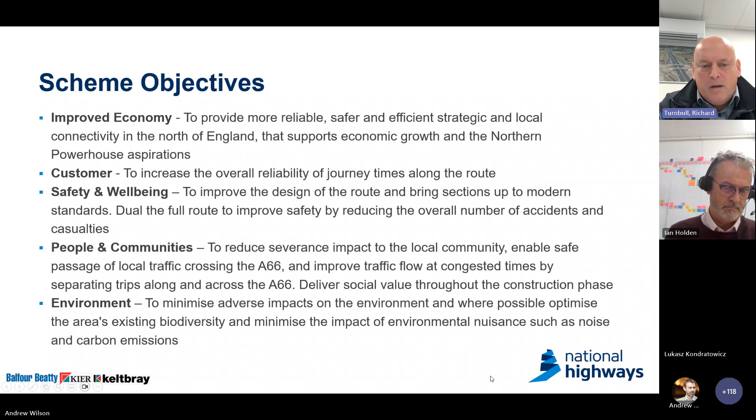Next slide, please, Andrew. So just to give an overview of the project, the scheme actually runs from Penrith in the west to Scotch Corner in the east. So junction 40 M6 is Penrith over to Scotch Corner. That's roughly 50 miles from Penrith to Scotch Corner.

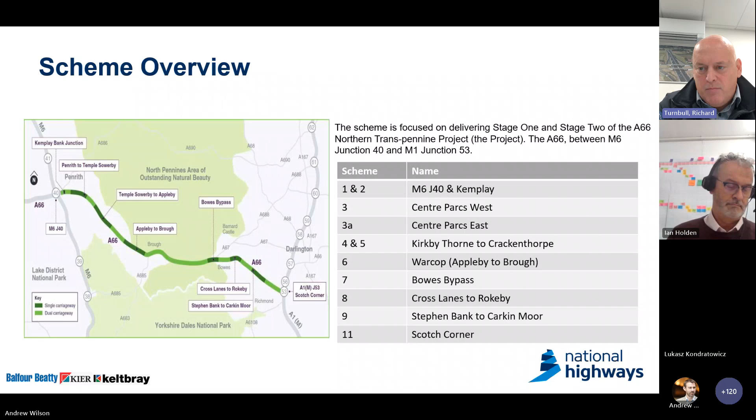Historically, over the years, 35 miles has been dualled in sections, and the scheme is to complete the dualling of the remaining 15 miles, over a series of schemes in one fell swoop. And I'll break that down on the next two slides, if we can move on, please, Andrew.

Starting at the west at junction 40, the Kier team will deliver the upgrade to the M6 junction 40 scheme and upgrade the existing A66 through Kemplay Bank.

We then move on to a section adjacent to Centre Parcs between Penrith and Temple Sowerby. That scheme will be delivered partly by Keltbray, scheme 3A, and a BBA scheme 3B to complete that as an interface there.

We then move along to a section where we actually go offline of the existing A66 route, and this is the only section where we have a bypass as such. So that's a Balfour Beatty Atkins scheme to upgrade the A66 offline and then in future detrunk the existing A66.

And then we move on to another section of online upgrade of the existing single carriageway to dual carriageway at Warcop, Appleby to Brough, which will be delivered by Kier.

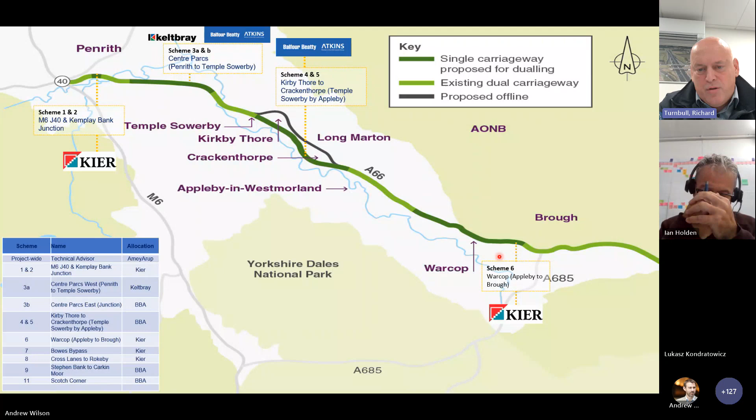Now those schemes, the first schemes we start, are further in development. The detailed design for those schemes is nearly complete. I'll move on to the milestones in the future, and give an indication of when we're actually starting works on those schemes.

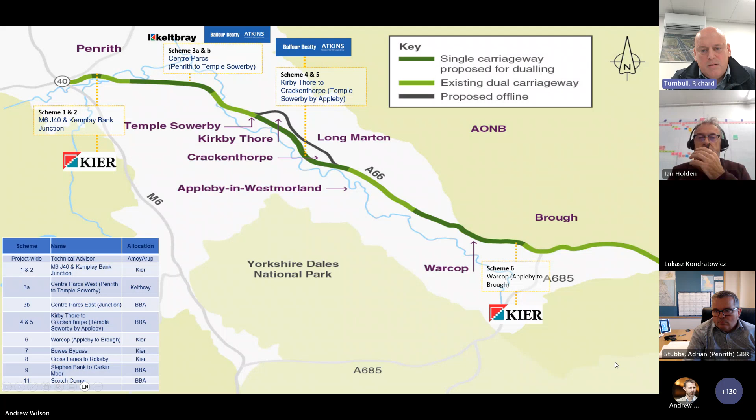Now, the design contracts for these schemes were awarded earlier this year, so these schemes are now moving into detailed design. They are a little bit further behind in programme than the schemes in the west.

So those schemes involve online upgrades of the existing single carriageway, and then some works around junction 53 on the A1 to upgrade at Scotch Corner. On completion of the scheme, we'll have a dual carriageway linking Penrith to Scotch Corner.

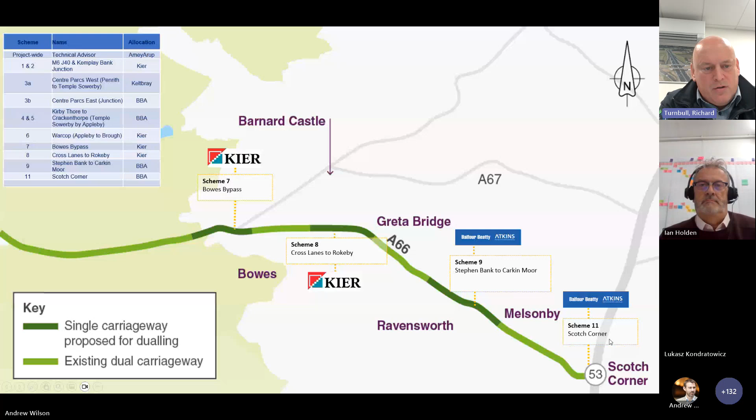We're expecting to start the earthwork season in 2025, delivering that mainly through four earthwork seasons and maximising those periods of hopefully decent weather, with 2028 allowing us to complete the later plugs released by diversions and structure completions and so on.

Typically the material that we'll be going through is glacial deposits over rock, with pretty much no hard excavation expected from the ground investigation we've carried out. Most schemes will have a cut-fill balance with limited haulage of that material going onto the road network.

At the moment, we don't anticipate any haulage between schemes in the west to the scheme over the Pennines to schemes in the east. They'll be operating and delivered independent of each other.

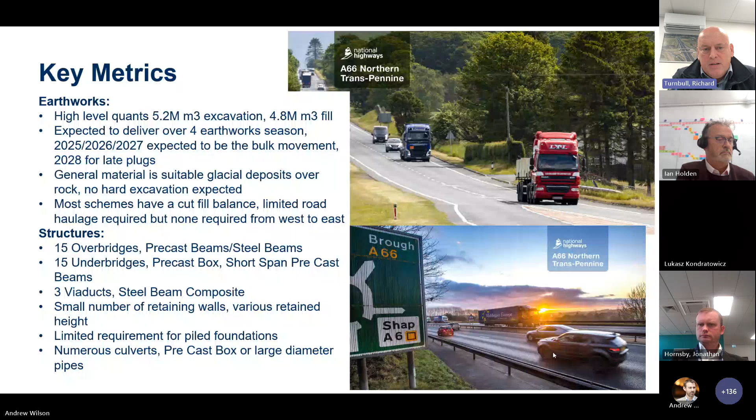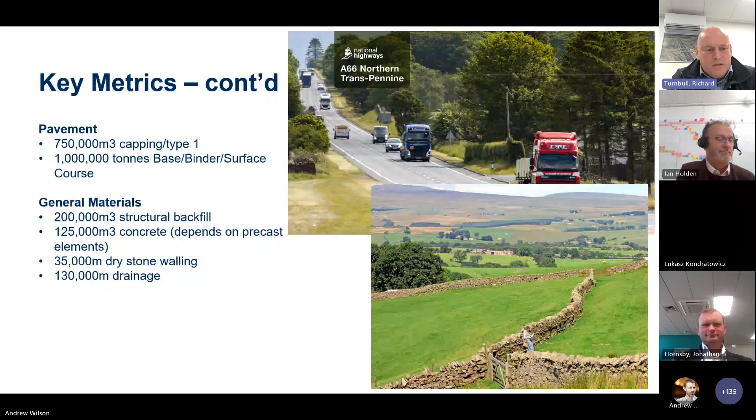Albeit, as many schemes have faced, we've had some challenges raised to that. We're working through that at the moment. We have an oral hearing planned for the 23rd of October this year. Hopefully we'll get through that. If we don't, most likely we'll be continuing through the judicial review process into April, May next year, where we expect to end up.

Works have already commenced on the scheme. In February this year, the Keltbray part of the team started a strategic diversion with National Gas Transmission, NGT, to de-risk the future programme. That commenced early this year and is being handed over to NGT for their diversion works.

I mentioned earlier, the eastern schemes have now been awarded to go into detailed design by the BBA and Kier team, so they're underway at the moment.

We are anticipating starting low risk advanced works later this year or next month. Key to that is the M2.1 and SGAR 5A being approved, and we expect those to be done. The M2.1 is currently with the Secretary of State for sign off, checking with consultees, and we're expecting that confirmed and signed by early October. Likewise with SGAR 5A to enable the advanced works to commence, we've had an initial review and we've got a follow up in late September to approve that.

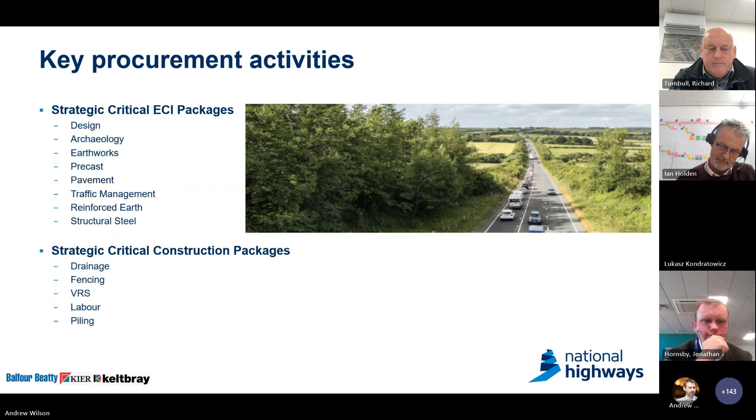So just looking at some of the complexities of the A66 and some of the challenges that we face, obviously recognising the times that we're in and the change in government and the spending review taking place at the moment, scheme affordability is going to be a challenge for us. The value of the scheme, the overall project, is going to be in the order of circa £1.7 billion for the whole route, which will be a challenge for sure.

It's something that we're working with NH at the moment. It is unusual — we're delivering the scheme as 3 DIPs, but working together collaboratively as an enterprise. So that presents its own challenges, and trying to coordinate and collaborate together to overcome the challenges that we'll face.

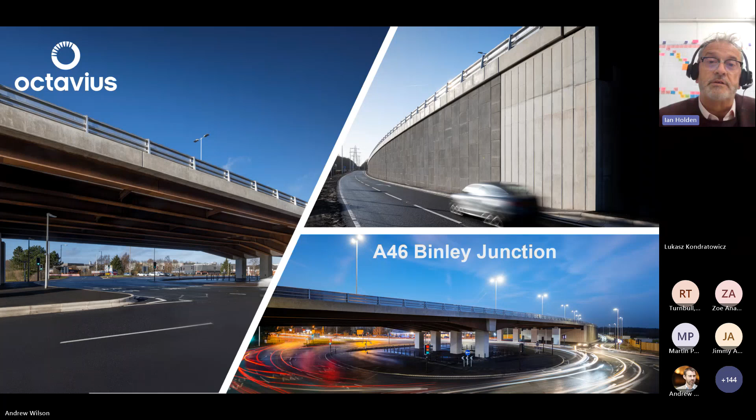If you go on, we have two junctions as a package just to the east of Coventry on the A46. The A46 Binley, pictured there, was opened for traffic in November '22. In terms of work, we're moving probably about a mile up the road and starting to look at the Walsgrave junction. Please, if you move on.

In a similar fashion, I guess the Walsgrave junction is strategically quite important. It sits on the A46 corridor, which is circa 155 miles long, running from Gloucestershire to the Lincolnshire ports, the Humber ports. The Walsgrave junction is currently the last at-grade junction between the A45 and the M6/M69 end, and it suffers at peak hours from significant congestion. There's a lovely artist's impression of what the scheme should look like there to the left.

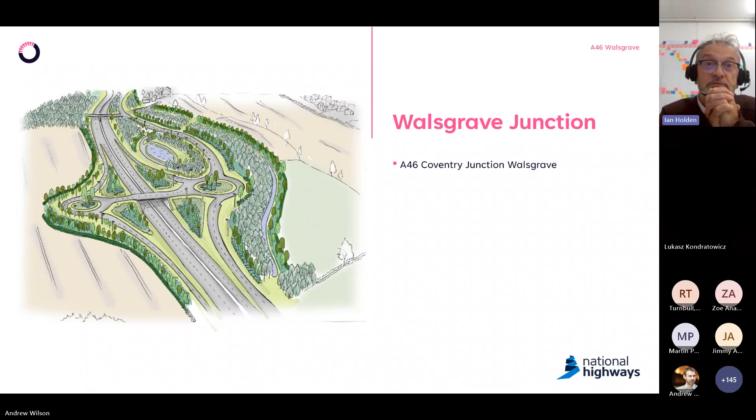If you go on, please. In terms of scale, it's an £111 million scheme budget. The design build budget's around circa 72 million, and the graphic there was used for the preferred route announcement. It's a grade separation using a compact dumbbell junction, just less than a kilometre north of the existing junction. There's a bit of realignment of the main line, and we're sandwiched between the Grade 1 listed Hungerley Hall Farm in the middle, the triple SSSI site of Coombe Pool bottom right, and residential areas. So there are challenges - it's a reasonably constrained site. Next, please.

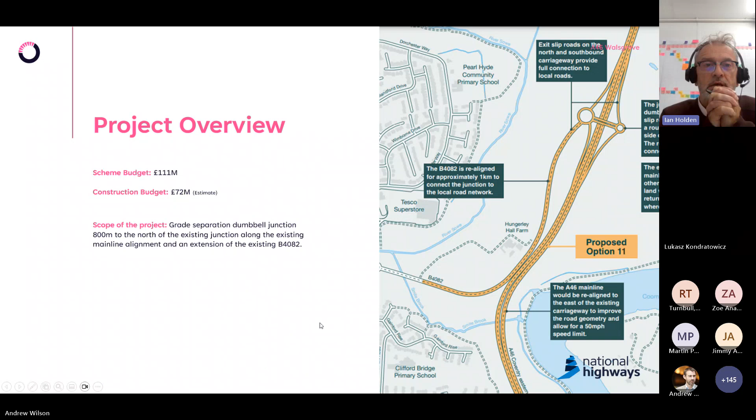Those scheme objectives, I think, were pretty word for word identical to what Richard shared for the A66 - unlocking the congestion, encouraging economic growth, creating a free-flowing network, becoming a safer network with reduced accidents, improving the environment, and becoming more accessible.

In terms of where we're at the minute, we're in the preliminary design phase. We've finished all of our site investigation and survey work - the GI surveys, pavement surveys, drainage, archaeology are all complete. We've done the preliminary design and we're busy finalising our DCO planning submission, which all being well will be submitted in the middle of November. We have 24 hours to take a huge sigh of relief and have a bit of a celebration, because that would be a huge milestone. Then we move into the examination period, commence detailed design, with a view of getting us to site late summer, early autumn, October 2026 - seems an eternity away - and that should see us completing in the summer of 2028.

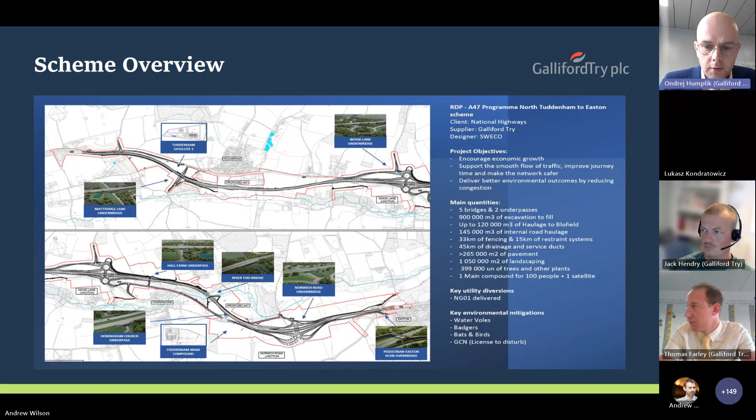From a utilities perspective, it's a really good story - we have managed to divert the majority of our utilities already, so a big risk is mitigated there. There will be some key environmental mitigations, some already taking place, and we will be building new habitats as we progress the work. In terms of the team, we are currently going through a huge amount of recruitment as we build up the scheme.

The main construction period is going to be next year, 2025, where we're going to ramp up. We will start the earthworks, we will start the drainage, lots of structures being built.

But we have managed to, through some good collaboration with National Highways, bring some work forward. So we are already in process of piling, that's well ongoing. We have already completed all the archaeology out on site, and we are now in process of importing some material ahead of the construction on site. So lots of work already happening on the scheme.

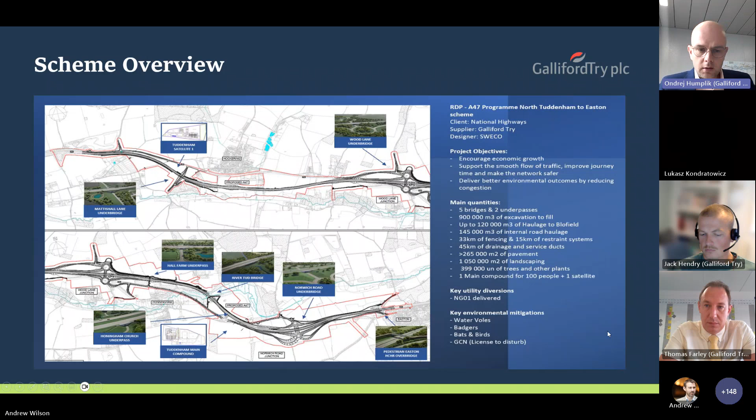So just a quick look at the timeline, if you can move to the next slide. We have already started some piling. Notice to proceed and start of work are imminent. We've had a little bit of a delay there, but we are looking at this week to claim start of works and get the notice to proceed.

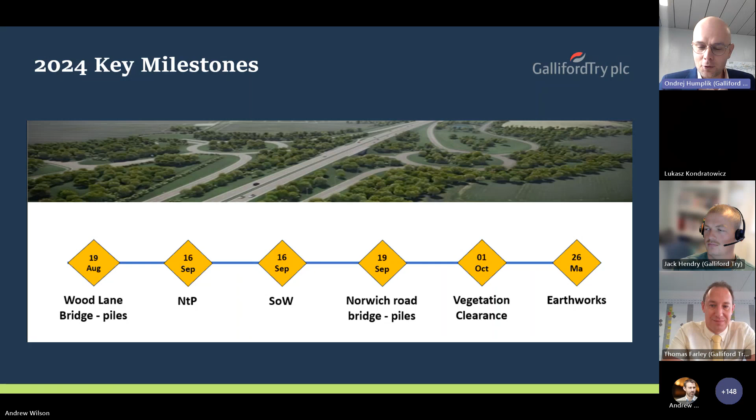Wood Lane Bridge piling has already happened ahead of program. We are making some good progress there. Vegetation clearance starts at the beginning of October, and earthworks starting, that should be the 26th of March.

So next spring, essentially, the major earthworks starting. And here's just an overview of what our key activities look like on one page. Essentially, start of work being claimed this week, and open for traffic in April 27, so 32 months construction period.

Our critical path runs through the key junctions which I mentioned. Everything else on the scheme is mainly offline, and it crosses in 3 locations where we're going to have crossovers. But the majority of the critical path actually sits within the eastern junction. And that's, I think, everything from me.

I will hand over to Tom.

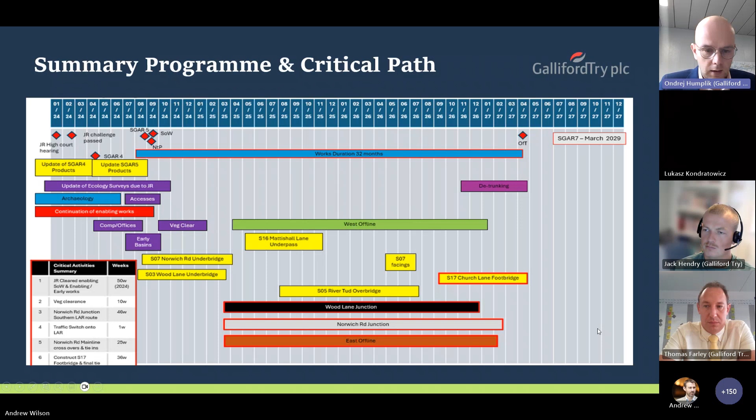Good morning, hi, I'm Tom Farley, the project director for the Blofield scheme. If you just move on to the next slide, please. So Blofield has basically commenced start of works, notice to proceed this week. We have started. So our key dates are open for traffic in May 26, with completion in July 26.

I've got a few slides which were going to go through the phasing, but for consideration of time, I'll just talk about this slide and where we are, and then we can move on to the next schemes. So fundamentally, we've got 2 structures in Blofield, one at the west and one at the east end.

The one at the east end is our critical path. We need to get that up so we can get the traffic diverted on the new carriageway underneath it. That releases the north side, and there's another structure to do as a protection slab over some utilities, and that allows that north side of the eastern structure to be constructed.

On the western end, we've got one structure which has got some ground improvements to do, which we're starting with at the moment. We're building the access platforms in for the stone columns into the western structure. Over the winter, the idea is to get everything hard so we can build those structures, and that releases the earthworks to start in April next year, which aligns with the movement of material from Tuddenham as well.

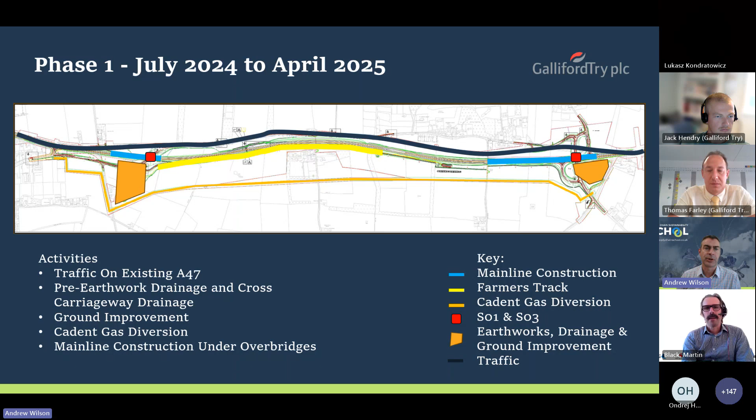So continuing our little tour, back up to the northwest, we find ourselves in Cumbria. I'd like to introduce Martin Black from Kier to talk about the M6 Lune Gorge project. Martin, welcome. Thanks, Andrew. So next slide, if you could.

Great stuff. So could you just go back one slide if that's okay?

Thank you. So yeah, just before we start on a bit of a project overview, I'll try and keep it as brief as I can because conscious of time. My name's Martin Black. I'm project lead for Kier on M6 Lune Gorge. I've also got Kevin Hannah, our MQS, will be chipping in a moment or two.

Just a brief overview around where and how we got to working on Lune Gorge. Kier were awarded and asked to look at Lune Gorge in 2022 by National Highways, and since then we've worked with our design partners RPS and Tony Gee, and Kier's own internal design teams, to look at the project in stages 3 through to stage 7. We're currently in stage 3 for everyone's information at the minute, and we're about to go into stage 5 in the next year or so.

So if you could just press onto the next slide, please. Thank you very much. So what is Lune Gorge? In essence, we are replacing 8 bridge decks on the M6. In the northwest, very close to the A66, the M6 in this area is an arterial route that links Scotland to England and vice versa. Without getting into massive amounts of detail, the bridge decks have issues with the half joints, which is a supporting mechanism. As a result, we've been asked to look at replacing all of the bridge decks whilst leaving the substructure in place.

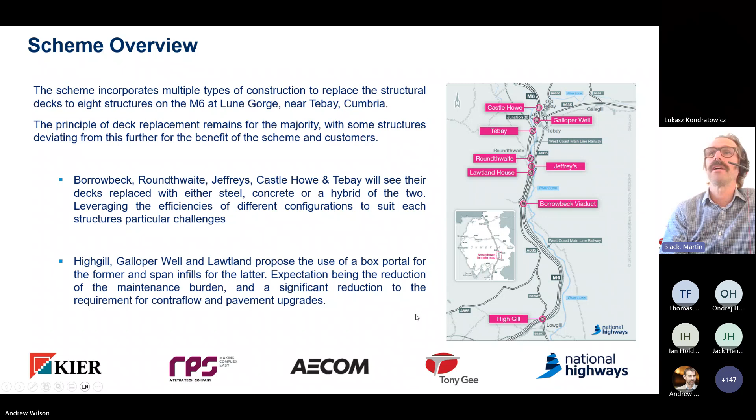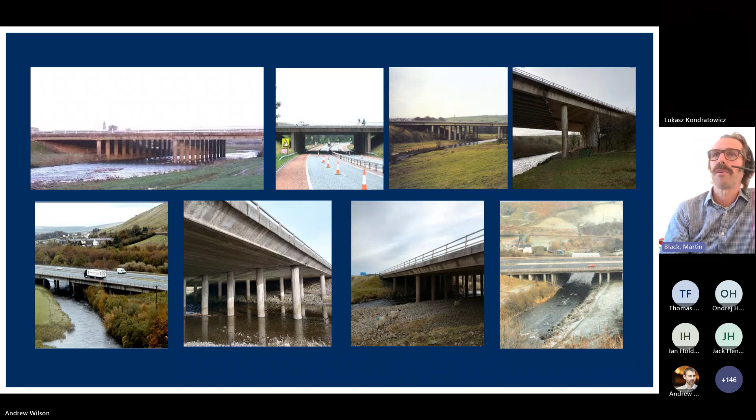So if we could move on to the next slide, please. Thanks, some pictures of some bridges. So these are all the bridges that we are looking at. A lot of them go over the River Lune because it's Lune Gorge. Some of them are in very close proximity to the West Coast Main Line, some go over the West Coast Main Line. Some basically have local roads underneath that are arterial routes for the local community in and around Tebay, which is interspersed with lots and lots of different alternative diversion routes. That's something that we need to consider as a project team. So photos of some bridges - if you could move on to the next slide, please, that'd be great.

Just to give an example or two of what we've been looking at - this is a cross section of Tebay. Basically, the original option presented to us via AECOM was to replace the bridge deck with steel beams. We've looked at that and refined it to come up with a ladder deck construction, which will enable launching. There are savings we're making as a result, which is reduction in steel tonnage and cost, but also where we are in the country, in the northwest on the M6, in the Lake District, it's wet, it gets windy. We're working on all of the bridges on a continuous basis, so we'll be working on multiple fronts. We've tried to reduce the requirement for large cranes, so we're looking at using gantries to remove existing decks and also to do some elements of launching.

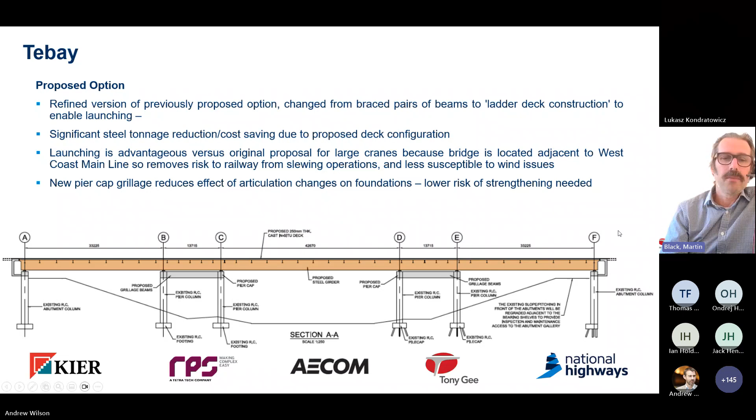So that's Tebay - it's a weathering steel deck, one of many weathering steel solutions. Next slide, please.

Lawtland House, as I said earlier, some of the bridges are in close proximity to the West Coast Main Line. This structure actually goes over the West Coast Main Line.

The original proposal was to replace the existing 5-span steel-concrete composite deck with a new like-for-like deck. We've looked at this, value engineered it, working alongside our design partners and National Highways collaboratively, to come up with what we believe is a better option: two structurally independent bridges with multi-girder weathering steel composite decks. One of the key drivers was reducing road closures on the local network, since there aren't lots of alternative routes for people to take. This proposal should reduce the closure of one of the local roads, the A685, by a significant amount, easing pressure on local residents and businesses.

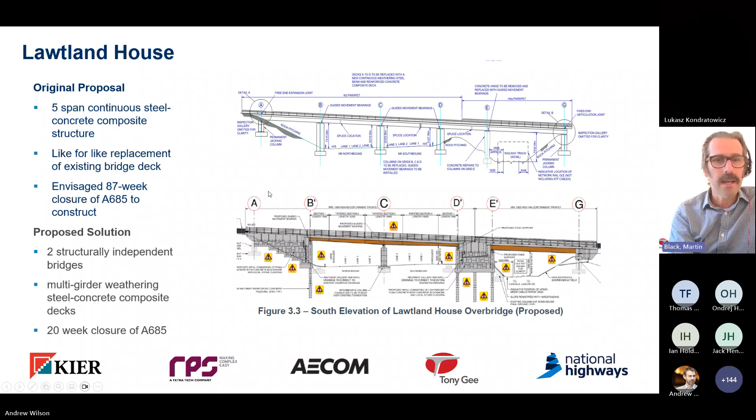The next slide is about procurement, so I'll hand over to Kevin to give an update on what we need to do in the next 5 years. I'm Kevin Hannah, one of the MQSs on the scheme. I get the nice dry section where I read you a large list of numbers.

The scheme duration Martin will touch on shortly, but here's a brief overview of the bulk quantities we need: over 7,250 cubic metres of concrete, 14,000 of fill. The combined steel and precast structures mean we need about 4,600 tons of weathering steel, and a similar amount of rebar. It's not a major resurfacing job, although it's quite a significant figure, as we're doing the decks and the run-offs to and from them, about 25,000 square metres of surfacing. The hybrid solution means we need about 2,700 linear metres of precast beams, made off-site, brought to site and fitted by our guys.

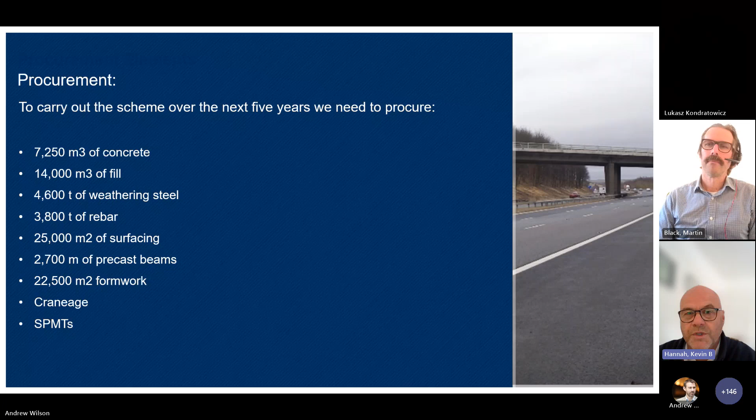The craneage and SPMT solution has been a real challenge for the guys. As Martin touched on earlier, because of the wind there, on some schemes we were only looking at 12% of days where we'd be able to operate the craneage we needed. So that's been quite an innovative approach where we've gone for a gantry solution.

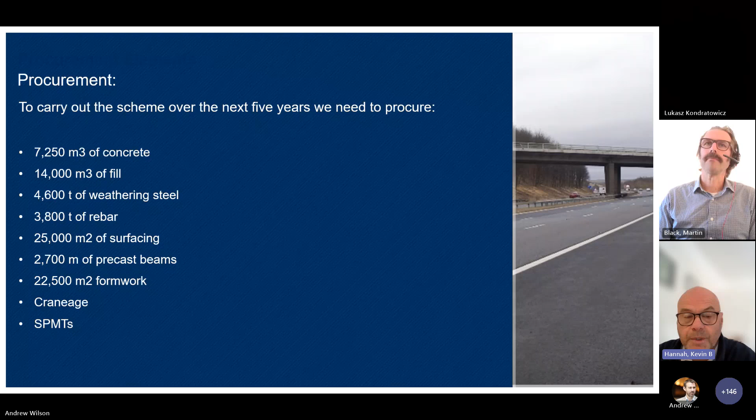Next slide please. Again, just touching on the early works: we start in earnest towards the end of 2026, but we've got some enabling works and early works we've done under what we're labelling Project 1 and 2 at the moment. We're looking for ECI support for the demolition of these structures, the steel work and reinforced concrete solutions, and temporary works, which is a major consideration throughout the whole length of the scheme.

To drop each side of these bridges, we're going to go to a 2-and-2 contraflow. So one of the first operations is to strengthen the hard shoulders, which will facilitate that. We've then got general pavement upgrades, and we're carrying out a lot of drainage surveys. Temporary works again is key - how we actually scaffold, prop, and access these bridges from underneath now and during construction.

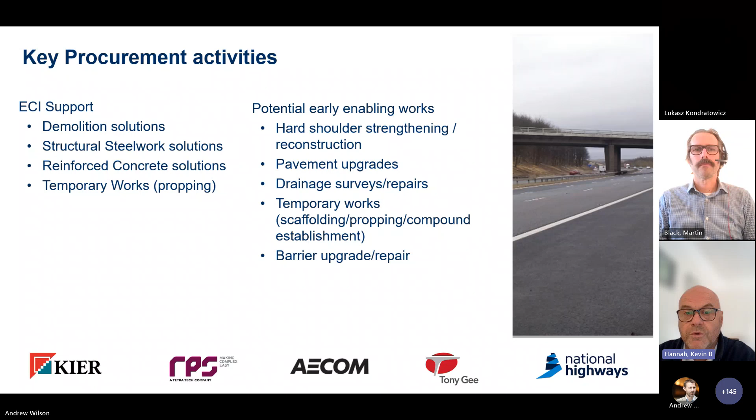Because of the linear length of the scheme, over 10 kilometres, there's the compound to consider. We have one main site compound and probably supplement that with 4, 5, 6, 7 maybe satellite compounds near each structure. And again, just because of the upgrades, we need to upgrade the barriers to facilitate the 2+2 contraflows. Okay, thank you, next slide.

Thanks, Kevin. One thing I'd like to add is that when I started the presentation, it was around replacing the 8 bridge decks, which some people might think is nice and simple. It isn't - the project also involves lots of other works, advanced works and enabling works. As Kevin mentioned, we'll be running 2+2 contraflow when we get into the main works. As part of that, we'll have to do some enabling works to upgrade barriers to make sure they're up to standard, and upgrade surfacing and hard shoulders.

From a programme point of view, we're currently in stage 3. We've split the project down into smaller projects to enable ease around governance. We're starting enabling works in January 2025, running through to mid-26, and then mid to late 26 we'll start the main Project 4 works, the demolition and reconstruction of the bridge decks. The southbound bridge decks will be done first, running a northbound 2+2 contraflow, then we'll do the northbound bridge decks. The project is currently anticipated to complete sometime in 2030.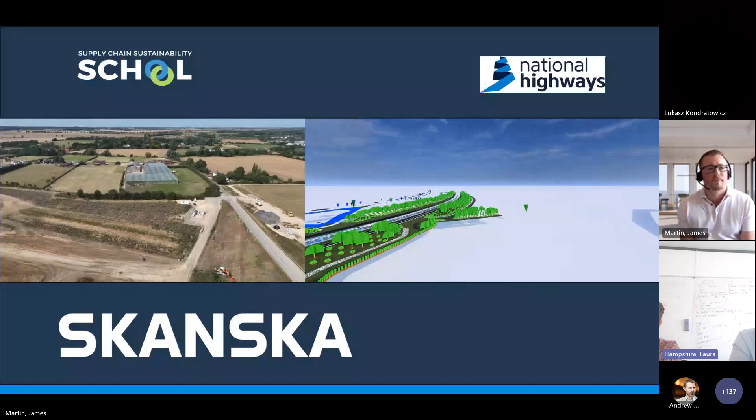This is what you've seen on the left-hand side of the screen, the current progression of the project. On the right is the BIM 360, how it's going to look like. So we're approaching the existing Roxton Road Bridge, which you can see there. That bridge is being replaced by a new structure in order to accommodate the new A421 and the slip roads.

Also, the bridge is being lifted up, so when the A421 started rising towards the new Black Cat roundabout, it's got enough headroom. On the left-hand side of the screen, you see the Roxton Road Link, a local road that gets rid of all the entrances onto the A421, making it a lot safer for members of the public. We're flying towards the north.

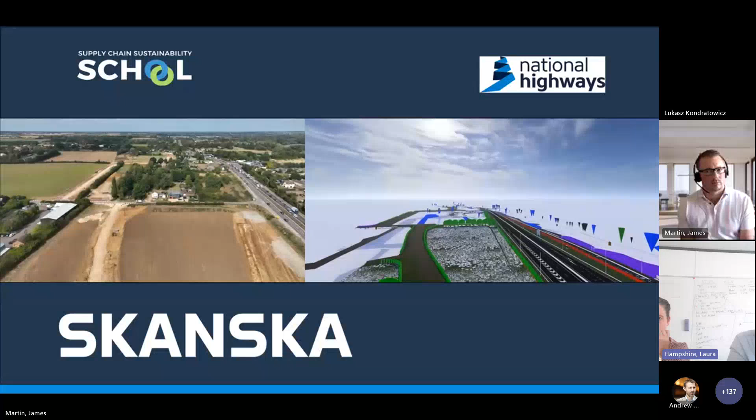You can see the Roxton Road Link carrying on the left-hand side with the A1 northbound on your right. It's quite long, that Roxton Road is, but yeah.

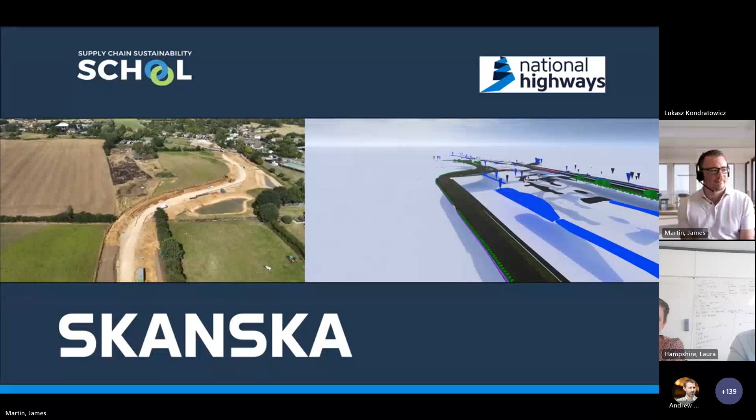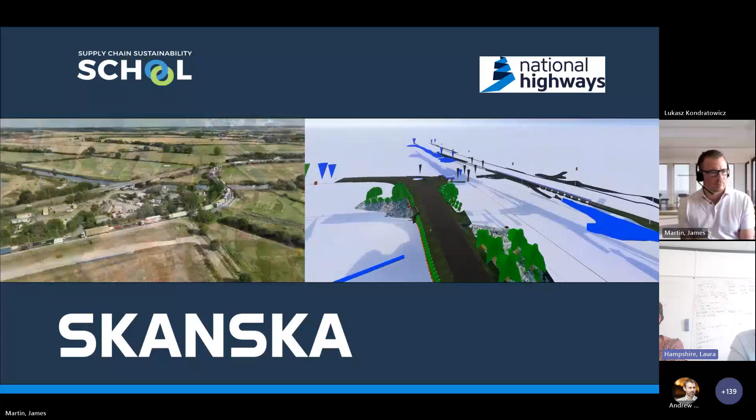So we use 90% of the time digital tools. We're expecting the subcontractors to use digital tools where possible. We've got all the setting outs done by digital tool, including for drainage.

This here, which is the most southern end of the job, is Kelpie Marina, which again is another local link that removes one of the accesses onto the A1, so when we construct the new A1 it's free flowing.

This is Black Cat roundabout itself, so you can see on the right hand side how the roundabout itself has changed. The A1's actually going in the box with the flyover for the A428, A421.

Now we're travelling east. We are working in a massive flood compensation area, what used to be the old Breeden Quarry. We have to backfill what Breeden took out as materials, backfilling it with 6A material to build our viaduct and the embankment over.

This is back onto the roundabout now. So just to give you a scale of the size of the project, we've actually got close to 4 million meters cubed of earthworks to undertake, and we're around about 1.3 million meters cubed into that, so within the first earthwork season. That gives you a bit of a scale of the size of the project we're dealing with.

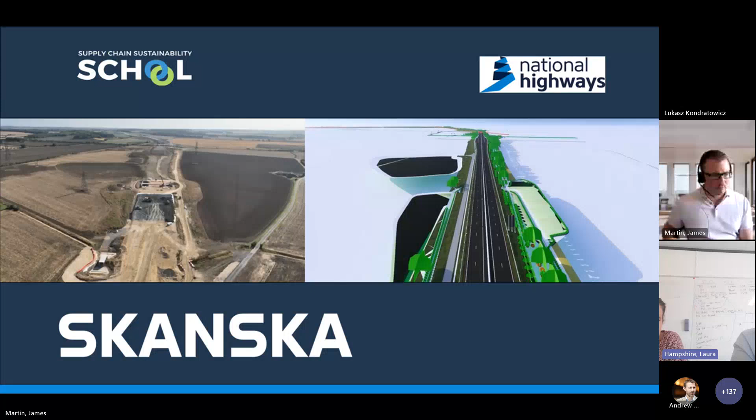This will give you, again, a good understanding of the scale of the scheme. So this is completely offline, this section. You can see we're about to fly over one of the culverts that we're currently constructing. And then in the distance on the left-hand side drone footage, you can see what we know as ST13, our bridge over the East Coast Main Line. As you go over, you can see the structure beginning to form.

So you're coming into what we call section 3 now. This is a massive area of earthworks haul, and you can see the cut and fill that we're now doing.

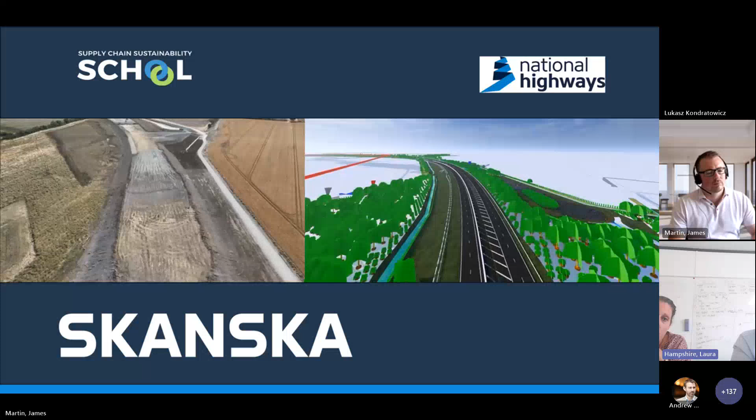On the right-hand side of the drone footage, you can see a logistics route. We actually have a logistics route across the entirety of the scheme, which obviously has a positive impact on the customer, because it means all of our workforce are actually travelling offline in the eastern section. We've got that right across, so you can get from east to west, from ST13 right the way up to Caxton offline.

There's an area on the drone footage on the left-hand side there, that's where we've had a badger. We've recently removed that sett, so that topsoil will be stripped. Now coming up to ST14, this is what a local access for a farmer is, so we're now working on that bridge bowl.

Moving further into the scheme, flying through slightly in front of us here. So we've got ST25 on the right-hand side. We're still in section 3 in the drone footage.

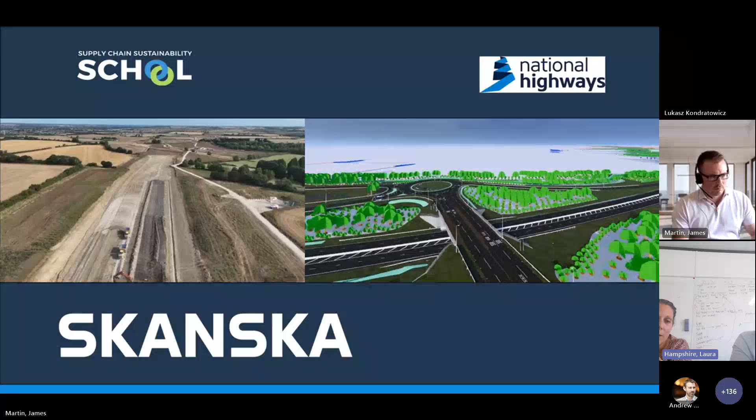Catch up, so here's one of the structures. You can see the main line in the distance on the drone footage. We're in the process of casting the walls. We've got Kelly's working on that area for us.

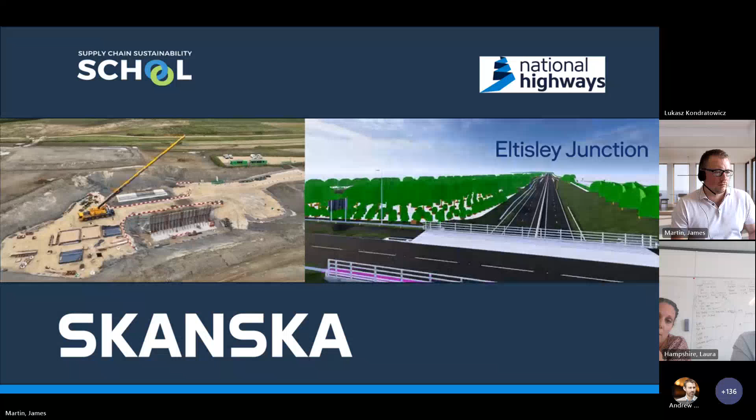Need to, we've got a few teething problems with the drone footage and the BIM model not completely realigned, so on the left-hand side we're still on ST25.

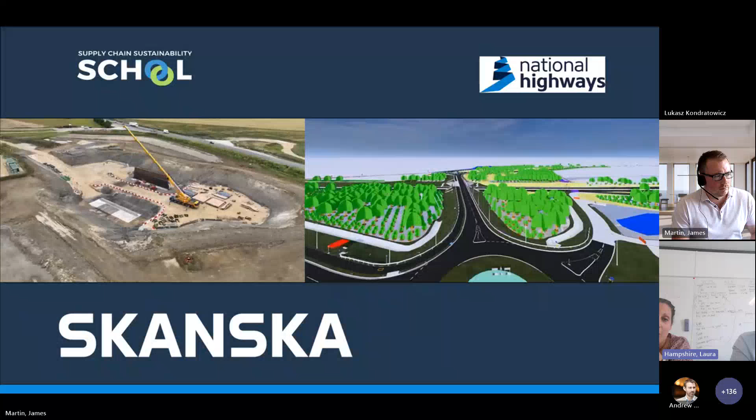On the right, we've moved on to Eltisley. There we go, drone footage has caught up with Eltisley. This again is another key junction for us.

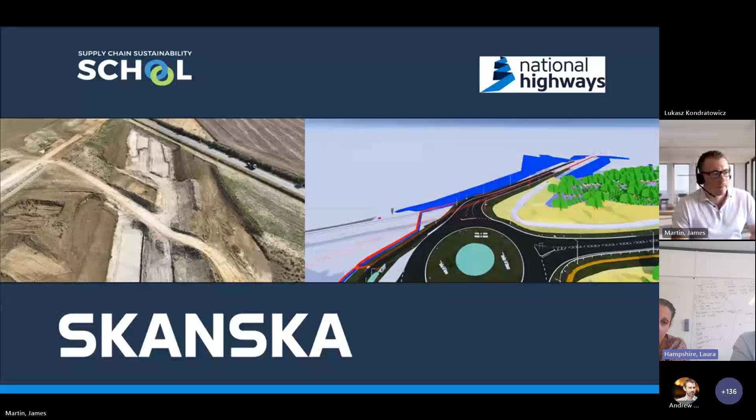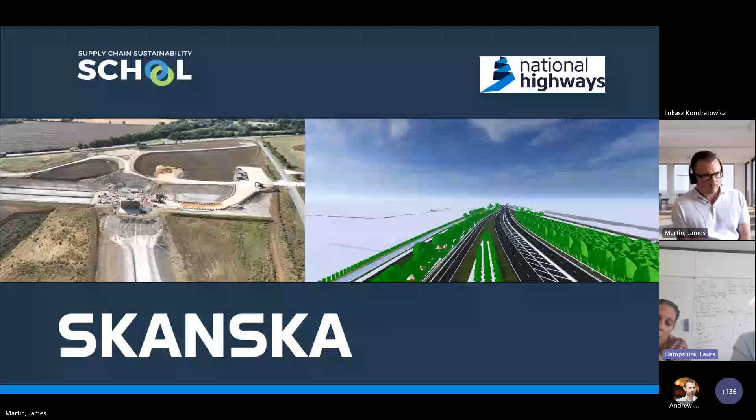So we are due to traffic switch in spring next year. We've got a number of stats to move in that location, and you can see the roadblocks forming really clearly at Eltisley Junction. We're working closely to some local roads as well. You can see the structure there in the middle of the screen on the left-hand side. So we're about to look...

And now going east up the carriageway, so this is up to section 6, the end of the job. This is Caxton, you can see bulk earthworks on the drone footage - that's one of our borrow pits. And that will take us about to the end of the job.

You can see really good progress being made. We're on about £1 million spend a day at the moment, but really good progress throughout the entirety of the scheme. That's us.

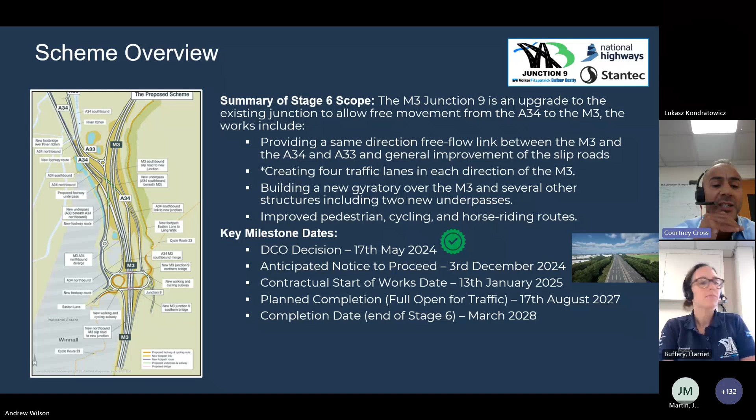Next slide please. So what you see there is currently just the scheme, so the need for the scheme, very similar to other projects. If you're looking at that image from the south, going from the bottom of the plan upwards, you basically have the M3, and the need for the scheme is to address the congestion around the gyratory, and that's effectively traffic moving from the M3 onto the A34.

How we effectively address the congestion and improve the safety is providing a free-flowing link from the A34 to A33 and the M3. That's through the reduction of slip roads to the junction. We also then create 4 traffic lanes on the M3, which helps to improve the congestion.

What we've also got is, in terms of the scheme, we change the gyratory of the M3 bridges. We construct 2 new bridges and demolish the 2 existing, and we construct 2 new 120m long underpasses. On the peripheral of the scheme, it's located within the South Downs National Park, so in terms of our social values and connecting communities, we provide a pedestrian, cycling, horse riding route - that's what you can see on the right-hand side of that drawing.

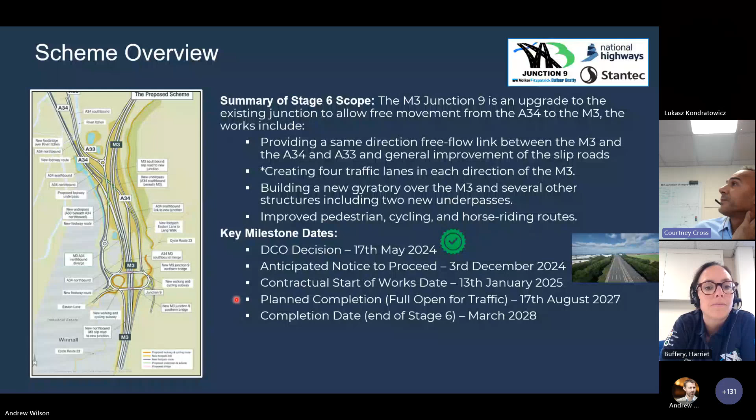Next slide please. Just in terms of the timescales, the scheme started in 2018. We set up a joint venture and are really reaping the benefits of working with our JV partner in terms of resource and procurement. We've gone through PCF stage 4, which is our DCO application. At the end of the year we'll achieve our stage 5 detailed design, and then, as we said, notice to proceed, and then working our way through to completion. Next slide.

The scheme, in a sense, is much smaller in scale to the projects we discussed before. There are 4 phases that we carry out - the traffic management phases, when we construct the works, that's the implementation of a contraflow on the M3. Our earthworks is about 375,000 cubic meters, we've got 15,500 square meters of formwork, almost 3,500 tons of reinforcement, 14,000 cubic meters of concrete. We've got steel beams for the new bridge structures, and a number of pile solutions for our tunnels.

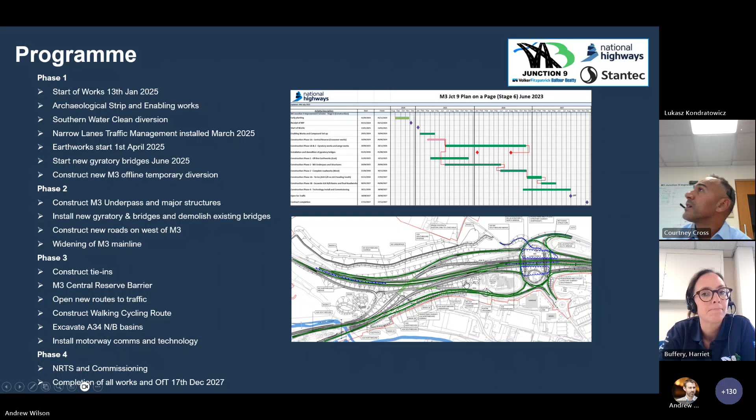And then working towards our clients' carbon reduction targets. We were one of the first projects in the south to establish a carbon management plan, working towards our current target of 17% in line with the National Highways requirement. In terms of meeting the impacts of other challenges, I'm going to hand over to Harriet now.

Harriet Buffery is going to talk us through the procurement and where we are as a project. Thanks.

Hi everyone, good afternoon just about. I will be super quick because I know we're overrunning already. I'm Harriet Buffery, the commercial lead for M3 Junction 9. Can I have the next slide please?

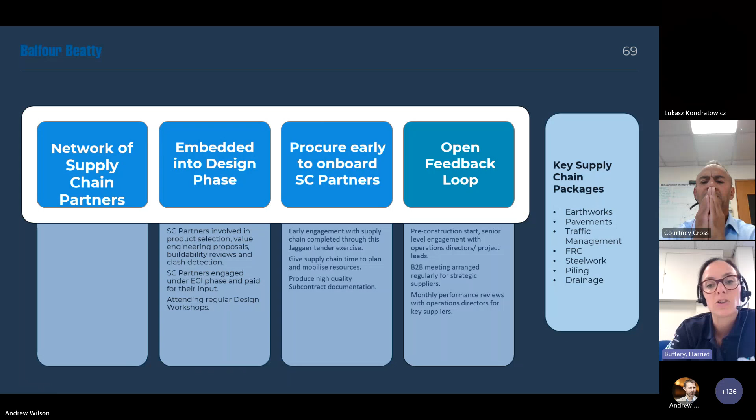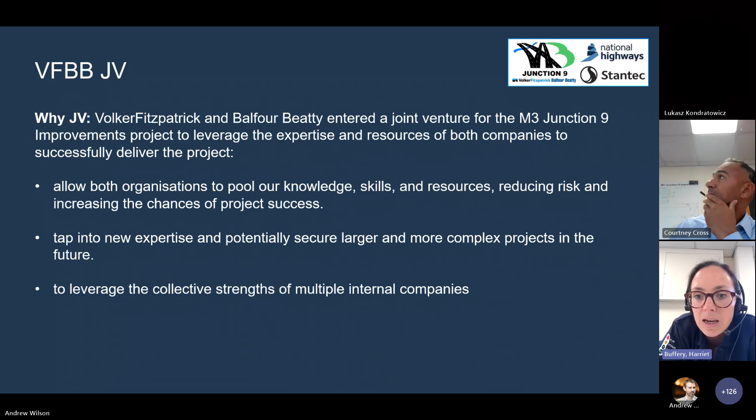And last slide, I think Courtney's actually touched on it already, but in terms of the JV and why we entered the JV, I thought I'd just touch on this. The two organisations came together last year to allow the pool of knowledge, skills and resources. Having personally worked in Winchester now for a couple of years, it is a bit of a challenge to get labour and resources down here, so it's good to have the pooled resource from both organisations coming together to bring our expertise and secure hopefully larger and more complex schemes in the future.

That's me. Thanks very much.